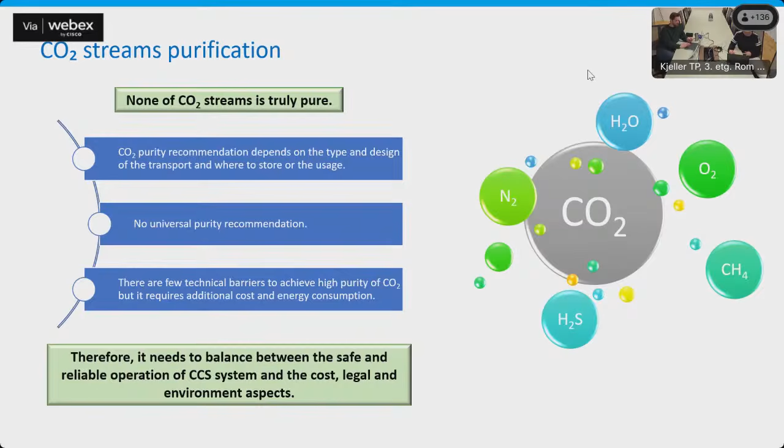So the type and concentration of impurity depends on the capture sources and the capture technology. The impurities can be divided into different groups, like non-condensable gases, for example, nitrogen, argon, hydrogen. Some impurities are reactive, for example, water, NOx, SOx, H2S, and CCS CO2 streams can also contain hydrocarbons, metals, and particles.

So the most important impact of impurity is that impurity changes the phase behavior and the thermophysical properties like density, viscosity, compressibility, and speed of sound, for example. So impurities shift the phase boundary, widen the phase envelope, for most impurities to higher pressure. This leads to narrower operation windows.

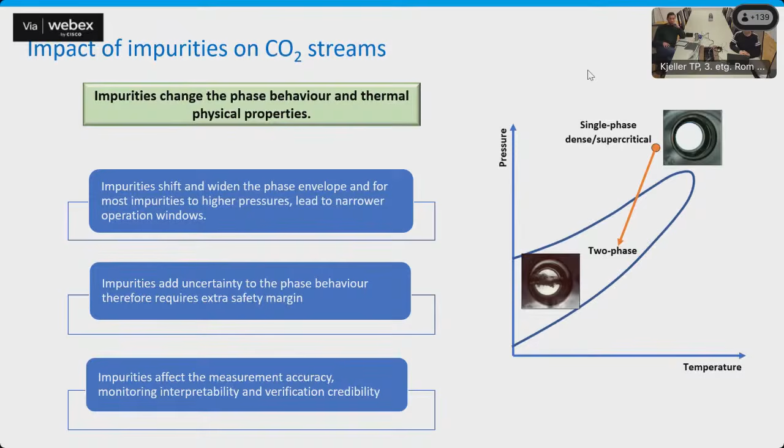Another aspect is unsafe operation of CCS infrastructures. Impurity can affect the integrity of infrastructure, both transport and storage. For example, material degradation: the impurity can drop out because the solubility varies with temperature and pressure, and one impurity can affect another impurity's solubility, so it makes the situation complex.

For example, if water drops out to form free water and reacts with some reactive impurities to form acid, then people can risk having corrosion of the pipes and the vessel walls, and can also risk having mineral dissolution in the well and reservoir.

Another hazard is solid blockage. The solid particles can come from chemical reaction, precipitation of salts and scale. When the temperature and pressure are in the hydrate formation zone, hydrate particles may also form. Some solid particles just come from the capture site. So those solids can clog to reduce the injectivity of the well and near-well region, and then reduce the capacity of the reservoir.

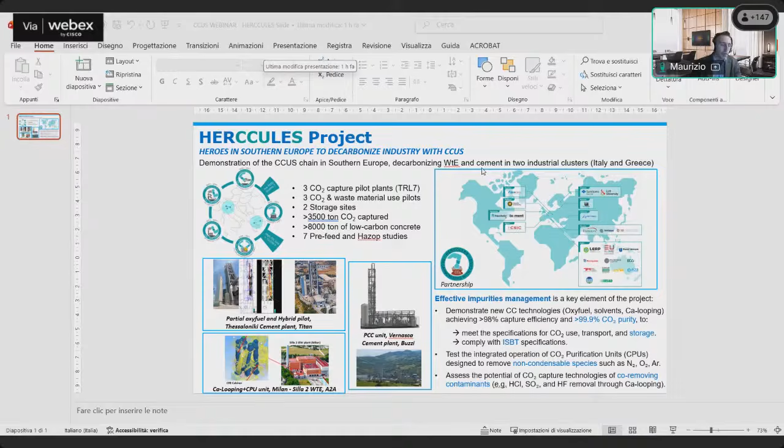I'm Maurizio Spinelli from LEAP. I'm the coordinator of the HERCCULES project. So HERCCULES, in 1 minute: HERCCULES is a very large innovation action focused on the demonstration of the entire CCUS value chain in Southern Europe. The project in particular aims to test several carbon capture and CO2 utilization technologies for the decarbonization of cement and waste-to-energy sectors within 2 industrial clusters located in Italy and in Greece.

So within the project, we are building and demonstrating 3 different CO2 capture systems, as well as 3 CO2 utilization and waste material recovery processes for the production of low carbon concrete. At the same time, we are exploiting 2 storage sites located in Southern Europe, in particular Ravenna in Italy and Prinos in Greece, in order to characterize and close the full demonstration of the CCUS value chain. Then, building on all the experimental results, we will also provide several full-scale case studies.

And HERCCULES is much more than this. We have a lot of activities in several areas. I have no time to talk about all these activities now, but I'm pleased to show the map on the right of our consortium, which has grown since the project started. I know that many partners of ours are joining this webinar today, and some of them will also contribute with some presentations.

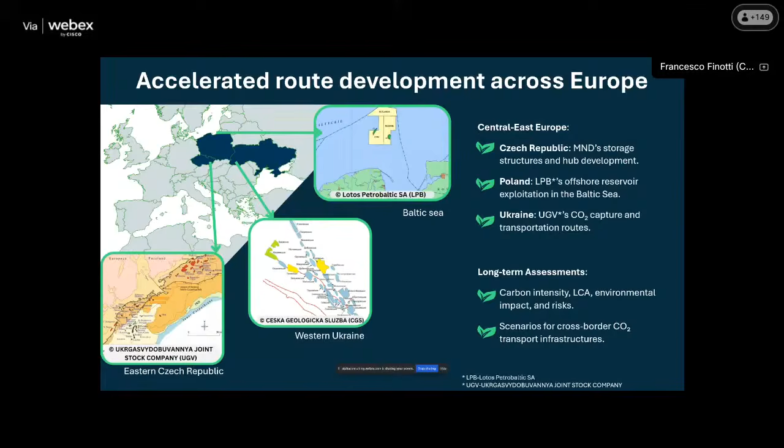So, in short, you will hear more from our technical people on the purity criteria. I think we'll have a lot of discussion on that. Thank you everybody, and apologies for the internet issues, now solved. That was it from my side.

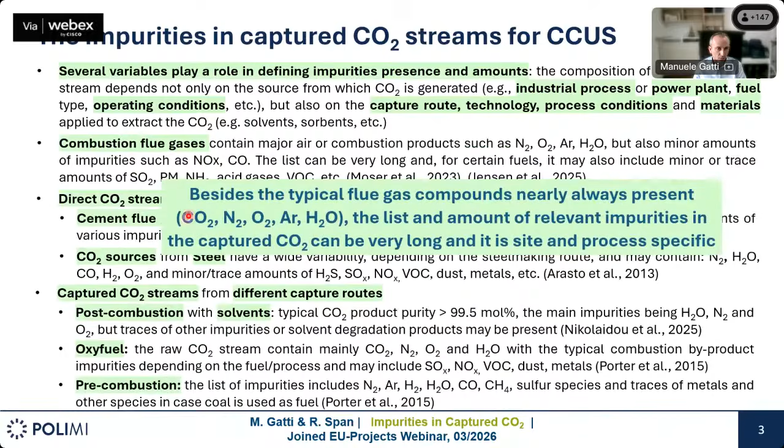Then looking at the CO2 quality specs, because it's the typical question if the CO2 quality specs can be harmonized, or if there are any guidelines. For sure, one starting point is the conditions and the mode at which CO2 is transported, because we have now multimodal transport routes, and we also have different possible ranges of pressure. We can have gas pipeline, dense phase pipeline, or ships. And for each of them, there are different constraints to look for.

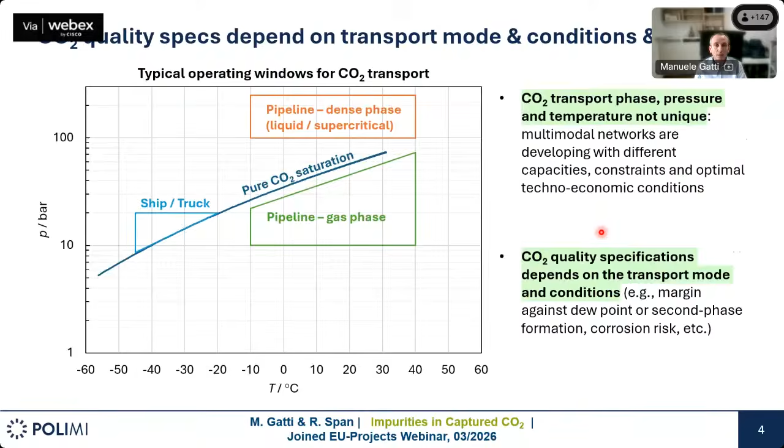So here the key points are that the focus should not be on the CO2 purity, because the CO2 purity is the balance. The real challenge is to meet the ppm level, often specification, on the most critical impurities. Impurities that then must be limited for several reasons, not only technical, but also health and safety, and also there should be the economic part that plays an important role for the deployment of the CCUS chain.

We know that impurities affect the thermophysical properties. We are going to see later a few examples, especially for non-condensables, and these in turn will affect the technical and economic part.

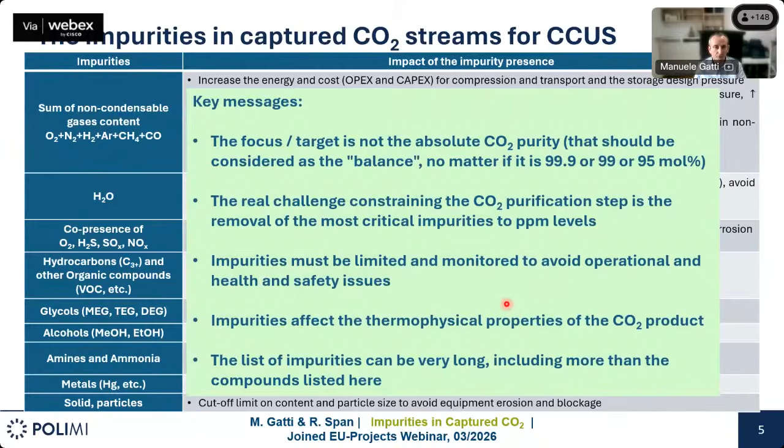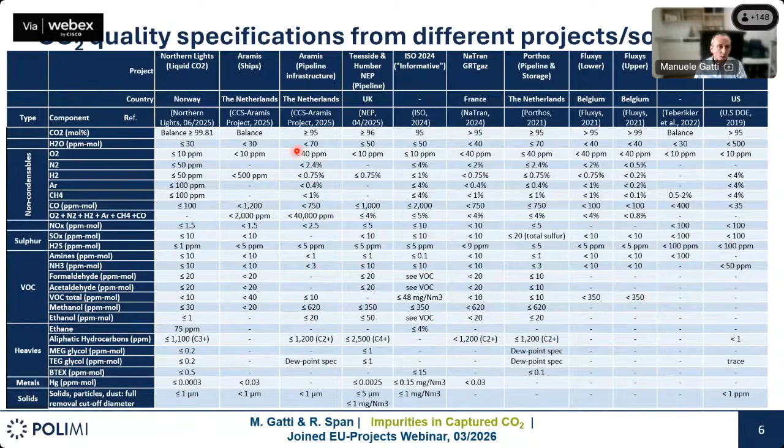Then, talking about the CO2 specification, again, I will not go through this very large table that comes from the publicly available CO2 specs from mostly commercial projects, but the idea is to give a few messages. You see that, again, for some of them, CO2 is already reported as the balance, because the real limiting factors are this list that is here kept shorter. Typically, if you look at the real CO2 specification, the list is even much longer, because there are several other species that here I couldn't include due to the lack of space. But for some species, the message is that specifications are aligned.

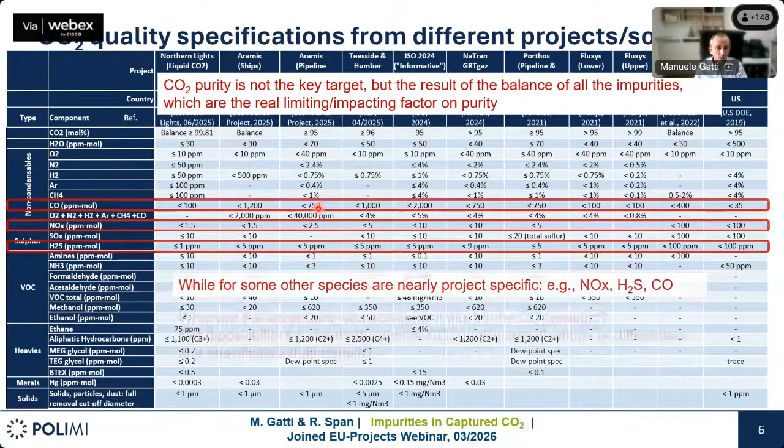For instance, for oxygen and for ammonia, they are quite harmonized among the different projects. But for some others, there are still variations that can be even of one order of magnitude between different projects. So the question is not only what are the acceptable compositional limits for a specific project, but if there is a possibility to standardize or to provide guidelines for the impurity limits.

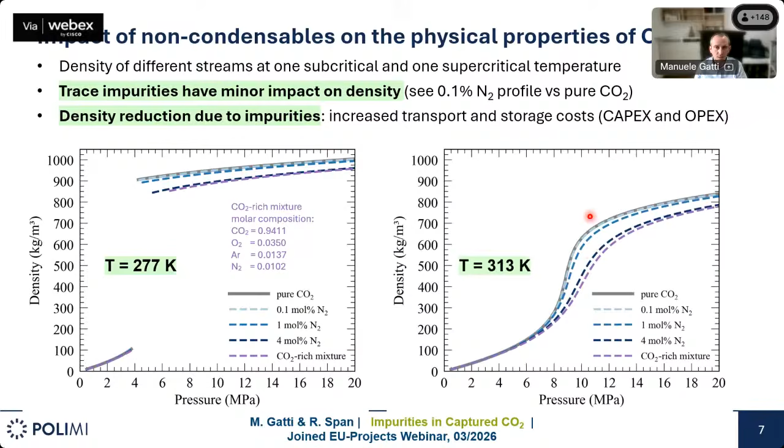Here is another isotherm at supercritical condition, where above the critical pressure of CO2, the deviation, the differences in density, is even larger. Then about phase behavior, as already anticipated by a few presenters earlier, we know that we want to avoid multi-phase flow. Either we are in the liquid or in the gas transport phase. We know that impurities affect the phase envelope.

For instance, here is the effect of different volatile impurities, so non-condensables. It's clear that, starting from pure CO2, they increase, and they may increase even considerably depending on the species, the saturated liquid line - that is, the pressure at which we need to work to stay above the saturation for a given temperature.

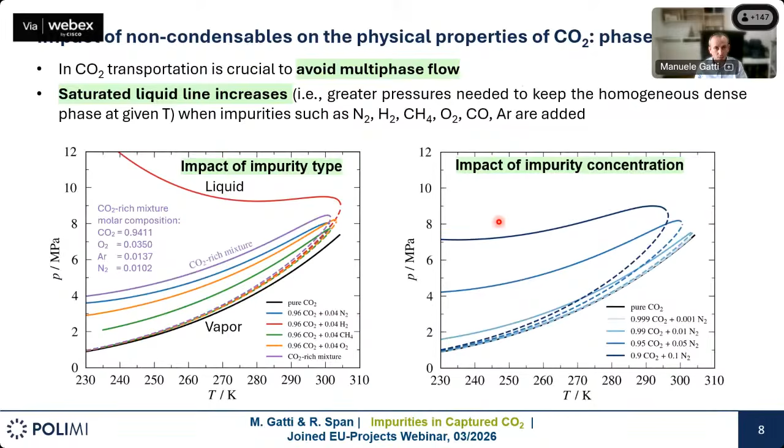On the right, you see the impact for a given impurity, for instance nitrogen, in terms of different concentrations. So from 1000 ppm up to 10%, you see a clear shift of the critical point, but also an increase of the saturated liquid line.

Then here a couple of examples we report are just to show that the topic is much broader than just defining a compositional list, because when designing the processes, or when analyzing them from the point of view of process modeling and simulation, even the selection of the thermodynamic model is important.

If for pure CO2 it is well known that the Span-Wagner model is the most accurate reference one, for mixtures, the choice depends even on the simulation environment, on what is available. For instance, here for the pure CO2, we see that we use Peng-Robinson in the vapor phase - it's reasonably accurate, but issues start occurring when we go into the liquid region. That is the typical issue of cubic models.

When instead looking at mixtures, here is an example of an oxy-fuel type mixture. We see that if available, the GERG should be the favored model, but here is a comparison of three different models like the GERG and Peng-Robinson with calibrated KIJ. Again, they are quite aligned in the CO2 compression power profile, so in the consumption for CO2 compression, but then differences arise in the liquid region.

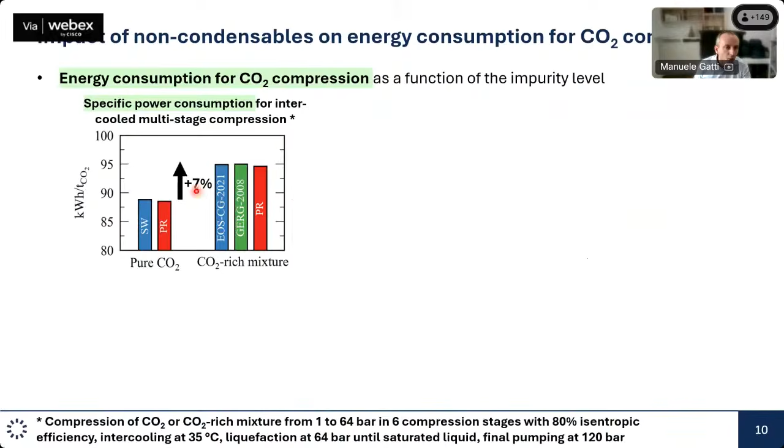Here are some numbers from the previous example on how much the CO2 compression power increases under the same conditions. So compression from 1 to 64 bar in the vapor phase, then liquefaction, and then pressurization in a pump - of course, for the mixture, purification should occur in between. You see here the clear increase in specific compression power, and of course this reflects into greater OPEX and greater CAPEX for processing, transporting, and storing the CO2.

Finally, here is an example of a CO2 purification unit that we have been designing and modeling with the previous tool. We start from a composition in this example that is typical from an oxy-fuel process from cement, for instance - this was from the CLEANKER project.

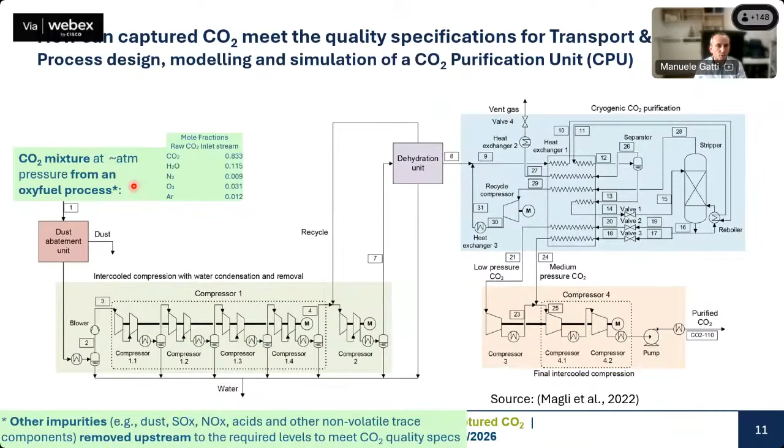We assume that upstream of it, the impurities that would end up with the liquid CO2 should be removed - so dust, SOx, NOx, acid, all non-volatile species that can affect the CO2 purification unit shall be removed in advance. And then we follow a typical process of the CO2 purification unit with an intercooled compressor that also has a knockout drum to remove water, which initially was 11.5% and is then lowered down to 2700 ppm. Then to reach CO2 specification in terms of water, the dehydration unit and adsorption dryer is needed. In this example, we reach this specification.

And then we enter the low temperature part where we have the cold box, where the CO2 rich stream is cooled down, in this example, to -50, because the temperature and pressure at which you do this, and also the configuration of the cold box, shall be optimized depending on different objectives.

In this example, you see how for a different content of CO2, the CO2 recovery changes as a function of the separation temperature. That is the key variable here. In this example, with refrigeration close to -50 degrees Celsius, we reached 10 ppm of non-condensable level in the CO2 product.

CO2 in this example is then pressurized in the vapor phase, but in other examples can be delivered as a liquid. Finally, in the off gas, part of the CO2 that was not purified is still remaining. In this example the CO2 recovery was 96%. Again, depending on the target, that CO2 can be further processed or recycled back in order to increase the CO2 recovery rate. The consumption here was 126 kilowatt-hour per ton of CO2.

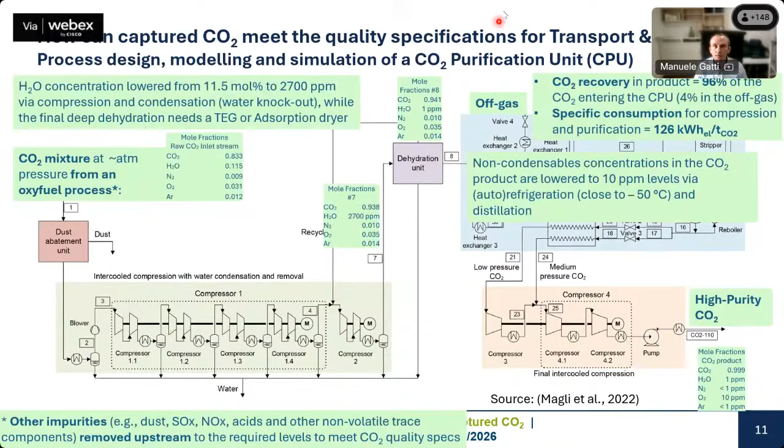Now I leave the floor to Professor Roland Span. Are you there, Roland? Yes, I am. Okay. Are you going to share your screen, right? Yes, I am. Good. You should see my screen now. Yes. Okay. So, thank you, Manuele, again.

Now, what Manuele already pointed out is that we have to look at different concentration levels for the different impurities. Depending on the kind of gas we are treating, depending on the capture unit, we typically see impurities in the percentage range, like nitrogen, oxygen, argon, or typical non-condensable gases. In the per mil range, we typically see water. And then we have impurities in the ppm range, typically components like SOx, NOx, H2S, whatever.

Now, the important message to all of you is people are usually discussing CO2 purities, but that's far too simple, because whether CO2 has a purity of 95, 98, or even 99.8% tells nothing about the really critical impurities at per mil or even ppm level. So even in 99.8% pure CO2, you can have unacceptably high concentrations of water, SOx, NOx.

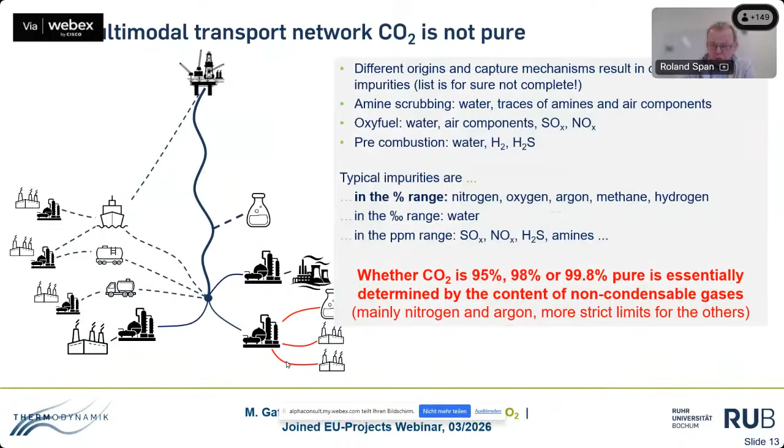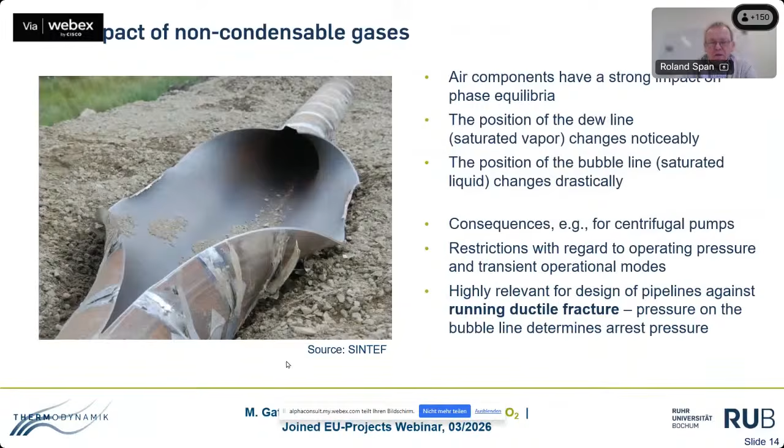Now, if we talk about non-condensable gases, many of you will be aware that for pipeline transport, they are critical for operational reasons, but mainly also for the issue of running ductile fracture. That's something Svend Tollak will go into in the next talk, so I won't mention that here any further. What people are usually less aware of is that for tank transport, non-condensable gases have a strong impact on the allowable storage time at medium pressure transport. But these are things that are pretty well understood. We do have good models describing mixtures of CO2 with non-condensable gases.

The next issue is water, as I said, up to per mil range in the raw CO2. The phase equilibrium of water and CO2 is very complex. We have vapor-liquid equilibria. At higher pressure, we have liquid-liquid equilibria. At low temperature, we are facing ice formation, hydrate formation. But still, all these phase equilibria are relatively well understood. And under pipelining conditions, we should expect that about 2000 ppm of water in CO2 are acceptable without forming a separate water-rich phase.

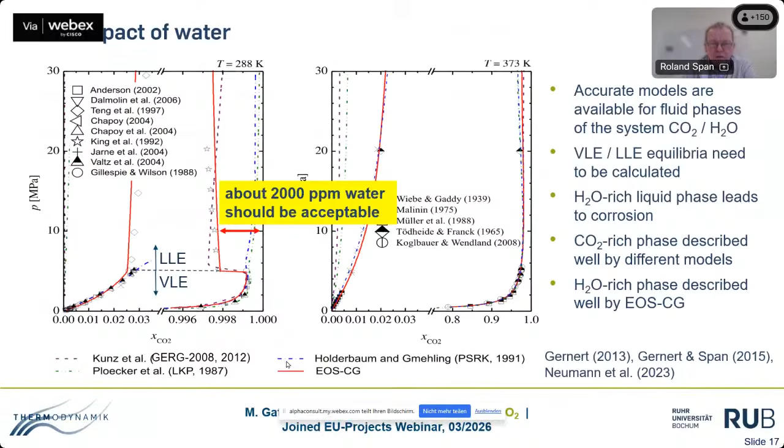Now, at low temperature in the pipeline, hydrate formation may become an issue, which may lead to blockage of systems. But this is understood pretty well too. So I didn't want to show the complex 3 and 4 phase lines of hydrates at this point. What industry is mostly interested in are the limits below which solid phases can occur, and that's something we can calculate.

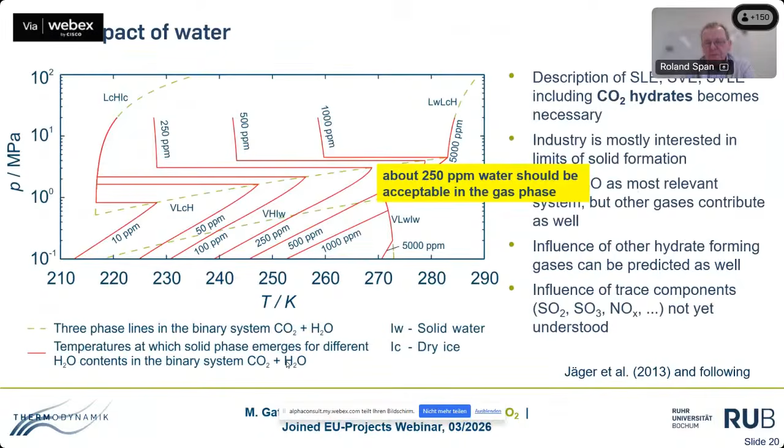So for gas phase transport, about 250 ppm of water should be acceptable without risking solid formation at typical pipeline conditions. In the dense phase, it's even higher, more than 500 ppm water would be acceptable. For medium pressure tank transport at low temperature, ice and hydrate formation becomes a larger issue. So in that range, we could accept only something like 30 ppm of water without the risk of solid formation.

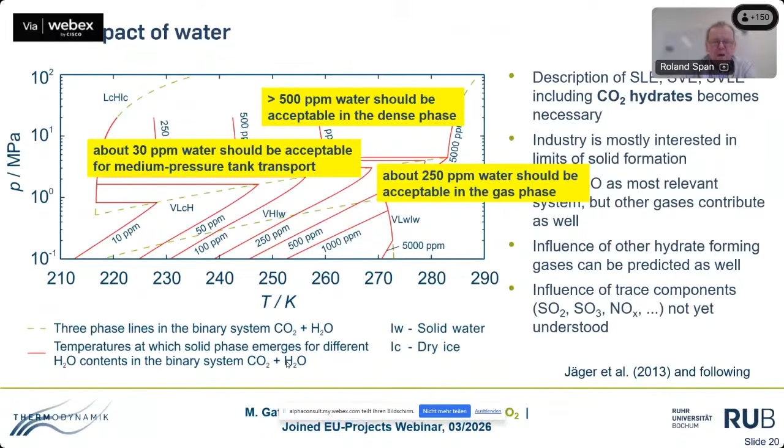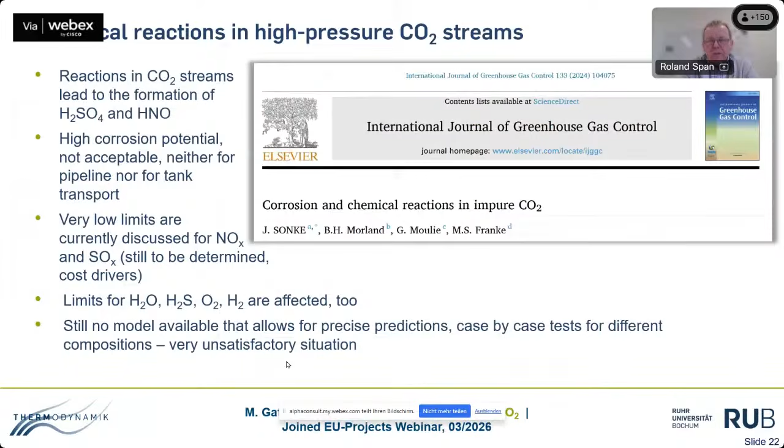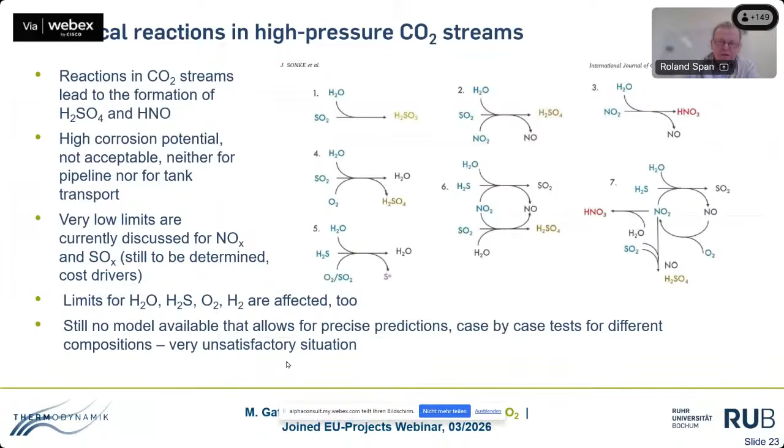And these reactions, in the end, all lead to the formation either of sulfuric acid or of nitric acid. And sulfuric acid in particular forms, together with water, a second highly corrosive phase at concentrations which are much lower than the concentrations we see for the condensation of pure water. Now,

IFE in Norway has run extensive tests, very complicated tests, to see where we find dropout of a second phase and where corrosion becomes visible. And the only software tool I'm aware of which is used to predict this is OLI MSE, which is kind of a black box software. In principle, we know what kind of models are used, but the parameters are proprietary. So it's hard for us as scientists to really evaluate this.

But Sonke et al. compared the results of OLI MSE with their experiments, and only in 19 out of 34 mixtures they got a qualitatively correct result. We don't have information on the actual composition of the acidic phase. But what is obvious is that we do not have models yet which describe the formation of acidic phases in supercritical CO2 at pipeline or at tank conditions with sufficiently high accuracy. And that's what most of the impurity discussions now are about.

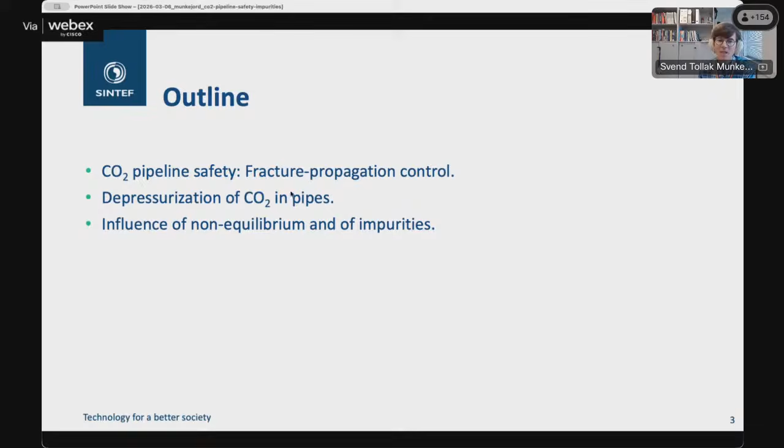All right, so I'd like to mention the concept of fracture propagation control. I talk about depressurization of CO2 in pipes, and mention influence of non-equilibrium and of impurities.

So I guess this is known to most of the audience, but just to reiterate, by mid-century, several countries, including the EU, have pledged to be climate neutral. We need to use all the tools in the toolbox, including CCS, and globally this would entail the capture, transport and storage of several gigatons of CO2 per year, which, as far as I know, is roughly in the same order of magnitude as natural gas today. So evidently we need a very large system, and it should be optimized and safe.

And of course, we have experience with oil and natural gas, but CO2 is different in several ways, and in particular because of the tight coupling between fluid dynamics and thermodynamics. In operation, we will be close to some of the thermodynamically interesting points, like the critical point and the triple point, which I'll touch on, and this gives phenomena like boiling due to depressurization or dry ice formation, etc. And engineers, when making safe and optimal systems, need models that are experimentally validated in order for them to be able to assign numbers to different effects.

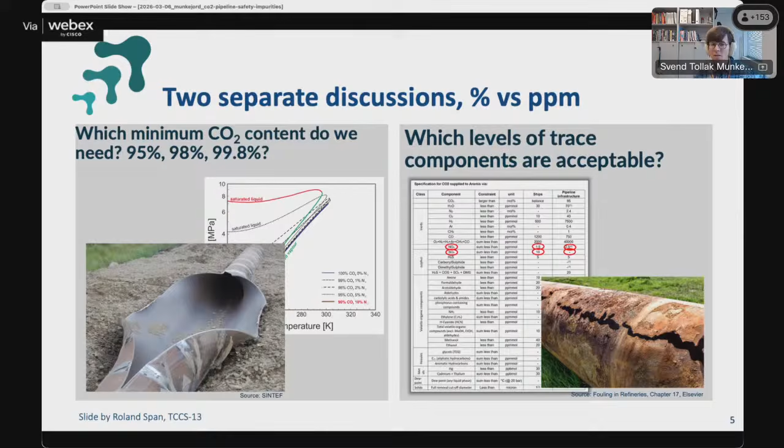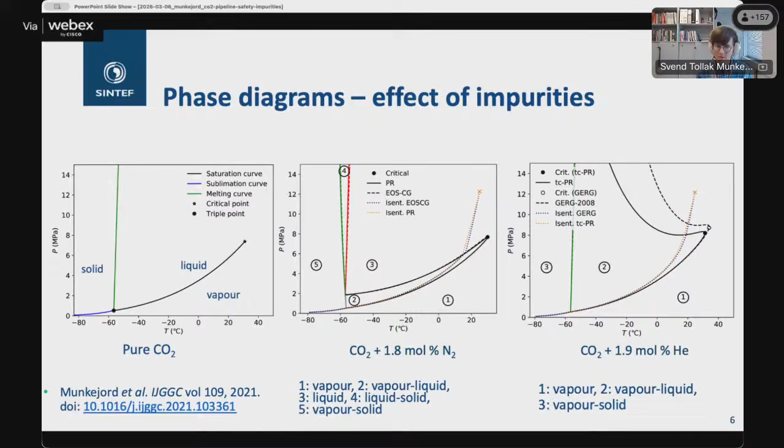Okay, now for running ductile fracture, what is it? Well, imagine you have a pipeline containing a pressurized and compressible fluid, and for some reason, be it corrosion or third-party impact, a hole is generated in the pipeline. Now you want to know whether the hole stays a hole or whether it will develop into a crack propagating along the pipeline. And in order to understand that, you need to understand the forces from the fluid inside the pipe on the opening pipe flaps, as well as the competition, as it were, between the crack velocity and the decompression velocity of the fluid inside the pipe.

Now, if the crack is faster than the fluid decompression, this means the crack will always stay at a high pressure, so it can continue over a long distance. And this is something you want to avoid by using the right steel quality and pipe thickness. Not too much, because then your large system becomes too expensive, and not too little, of course, which would be very detrimental.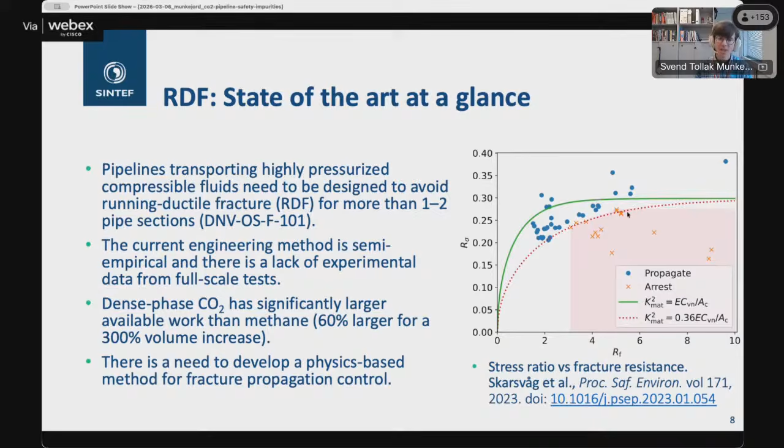And in particular, when making this plot, you put in the measured pressure, but when engineers want to evaluate a new design, they typically put in the equilibrium pressure, the boiling pressure, and they are not the same. And in addition, this method assumes that it is only the pressure at the crack tip that decides, and that's also a strong simplification. So there is a need to develop a physics-based method for fracture propagation control.

At SINTEF, we've worked over some years on a coupled finite element computational fluid dynamics model describing running ductile fracture. And it consists of a 1D CFD model that describes decompression and flow inside the pipe and out of the pipe, and a finite element method describing the pipe and the crack propagating.

But first, some validation we did some years ago for CO2. So I'd like to briefly explain this. The plot at the left shows crack speed plotted as a function of crack position. The red dashed line is the experiment, and the black curve is the simulation. And you can see that the experiment has a slightly coarse resolution. This is because of the way that it's done. You attach strings around the circumference of the pipe, and when they break, you know where the crack is. But at least there is a ballpark agreement here.

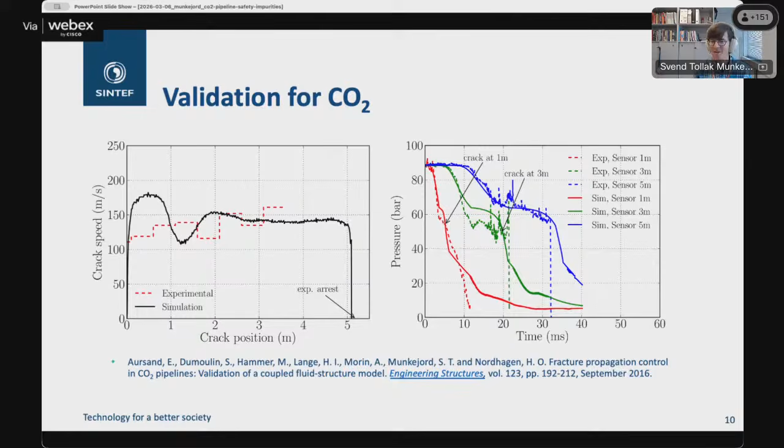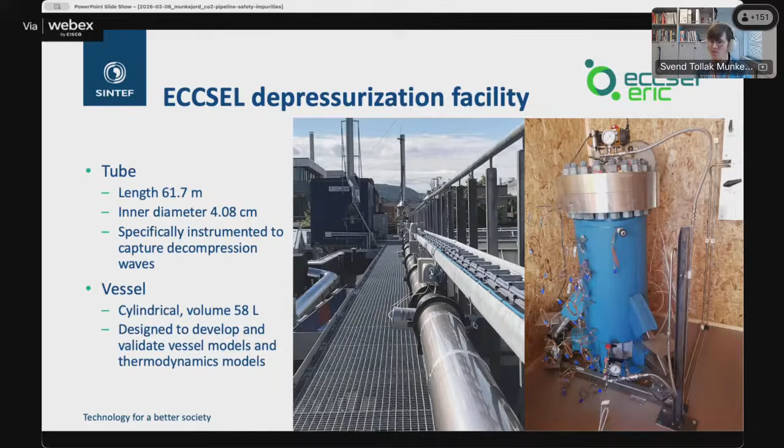Okay, so now for some further development and validation of flow models. For this, we use data from the ECCSEL depressurization facility, which is located at the Thermal Engineering Lab in Trondheim. ECCSEL, by the way, means the European CCS laboratory infrastructure, and it consists of several labs in many countries. This is a 60-meter long tube. It's densely instrumented with temperature and pressure sensors so that we can capture what happens when there is a full bore rupture. There is also a vessel, but I won't talk about it here.

Now, at one end of the tube, there is a flange like this, and we attach a rupture disc, which is fabricated and calibrated to rupture at a given pressure. So for the experiment, we slowly and carefully raise the pressure inside the pipe. At a given pressure, the rupture disc ruptures, and then we take the data of what happens when the pressure wave travels upstream. Doing that, we can make plots like this, and I'll try to explain.

So if you look at the left-hand plot, there are 3 positions at which we measure the pressure. The blue is close to the outlet, and the 2 others a bit further upstream. There are 3 different fluids here. The full line is pure CO2, the dashed line is CO2 with nitrogen, and the dotted one is CO2 with helium. And you can see, looking at the green one here, for instance, the pressure drops later with CO2 helium. This means that the pressure propagation speed, or speed of sound, if you will, is slower in the mixture. It also levels off at a higher level, which means that this mixture boils at a higher pressure, as you also saw in the phase diagrams.

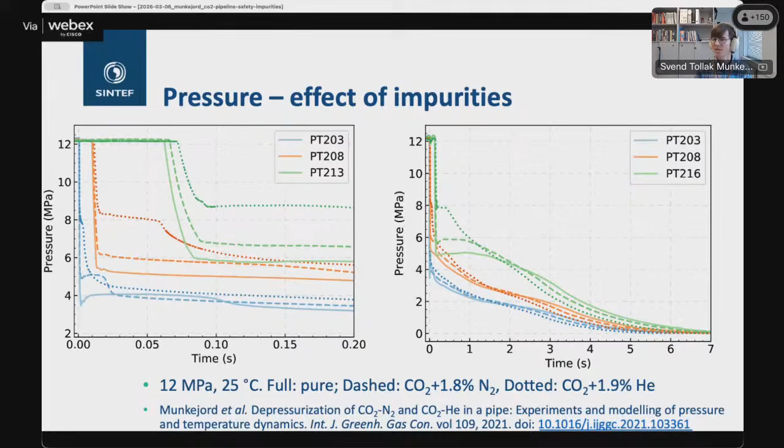Then there is an interesting point that I'd like to talk about briefly here on the plot where I show a longer time series. Initially, the full line here for the green one is at a lower pressure, as you can see also to the left, but after 2.5 seconds, more or less, the curve showing the pure CO2 has the highest pressure. So there is an inversion. And the reason for this, in our understanding, is because pure CO2 has a lower pressure propagation speed for a fully dispersed gas-liquid mixture, which you have at the outlet. So this means that the pipe with pure CO2 is emptied slower than the ones with mixture.

Now, using these data, you can make a plot like this, which is used by engineers for assessing running ductile fracture. It's a bit quirky, but this is how it's done. So they plot pressure as a function of wave speed. This is the speed by which pressure advances with respect to the fixed pipe. So if we concentrate first on the right-hand side, the decompression starts here at 12 megapascal, then it goes downwards like this. You can see here there is good agreement between experiment and calculation. We used, by the way, for pure CO2, the Span-Wagner equation of state here.

At this point, interesting stuff is happening. So if we assume full thermodynamic equilibrium, then our model tells us that as soon as we have any vapor present, the wave speed jumps down to the value here. Now, instead, if we assume that the liquid would stay liquid, metastable, then we get the green curve, and our data shows something in the middle. So this does not mean that the Span-Wagner equation of state doesn't work. It only shows that in this case, the process is so fast that there is no equilibrium.

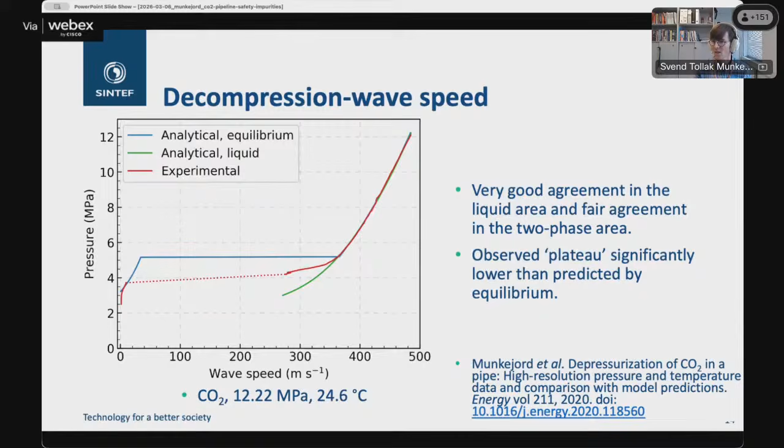Okay, now if you have a pipeline and you want to consider different operating windows and how this will influence running fracture, it's useful to make a plot like this. So fast decompression will be isentropic, so that's why we illustrate various isentropes here. And you can see on a summer day, for instance, with more than 20 degrees and a pipeline with a low pressure, you can hit the 2-phase region at a higher pressure than for a cooler day and a higher pressure. So in effect, for running fracture, a lower pressure in the pipe can be more severe than a high one, which is counterintuitive until you've seen this plot.

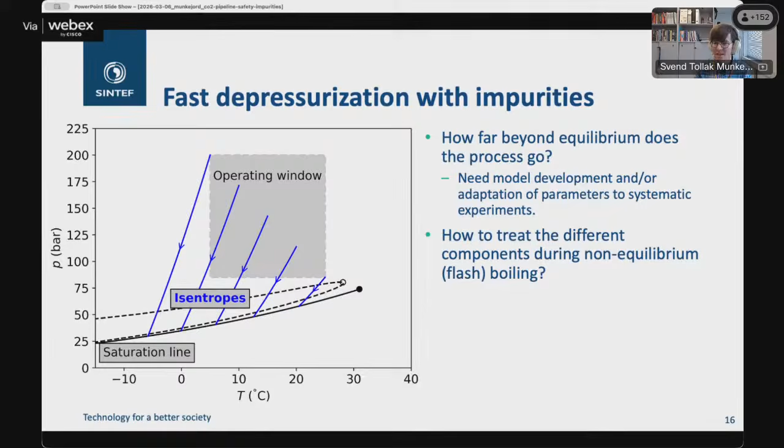And with this, I'd like to conclude that pipelines transporting pressurized compressible fluids must be assessed for running ductile fracture. Current engineering methods are mainly empirical, and more accurate design requires the development of models containing physics, including the influence of non-equilibrium on the boiling pressure and pressure wave speed, and also the behavior of impurities in that process. And we need systematic depressurization experiments for model development and validation. And also, these insights will be directly relevant to understand other but similar processes like the flow through nozzles or valves or leaks and the dispersion of CO2 in the surroundings following a leakage.

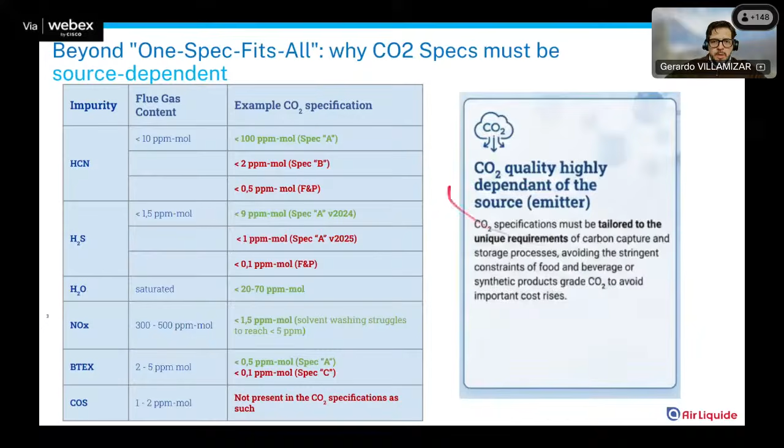I put other examples which are not related only with corrosion, but with safety, like aromatics. There are several specifications out there. Depending on the flue gas content, the specification may or may not be an issue. Of course it also depends on the capture technology, but this example is with a given capture technology. This is why the message is: the quality is highly dependent on the source. We cannot conclude only by looking at the product, we need to see also the feedstock, which brings me to the next slide.

This is a critical component, the liquefaction terminal. Why? Because in this case you may end up having two different specifications: the ones for the pipeline before the terminal and the ones for the liquid CO2. So the key message here is, we saw the CO2 specification's criticality depends on the source, but also on the industrial setup, which means a well-defined CO2 specification must include not only the values of impurities, but also the conditions where this specification has been defined: operating conditions, temperature, pressure, liquid, dense, gas phase, or other.

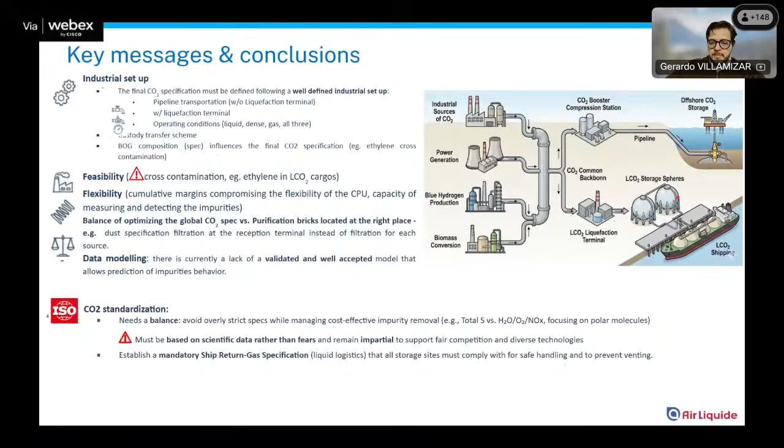Key message and conclusions also here. So again, this is always a balance, and when it comes to balance, we need to talk to measurement. And measurement is really critical, because it not only impacts capex, but also impacts the contractual framework. Having specifications in the table as 'not allowed,' 'balance,' 'zero,' or just families is simply not acceptable. You cannot measure balance.

You need to measure 99.99, 99.5% mole of CO2. You cannot measure balance. So it may work for a scientific work, but for industrial projects, it doesn't work. It's as simple as that. We need to have values of the impurities and the CO2 in order to contractualize an industrial project. So this kind of wording is simply not acceptable, not workable, not real.

Families - what is the issue with the families? It's because we cannot measure aromatics. We need to measure something that represents the family. So we need the breakdown. When it comes to total sulfur, we need the sulfur speciation. We cannot just measure the family. This is critical.

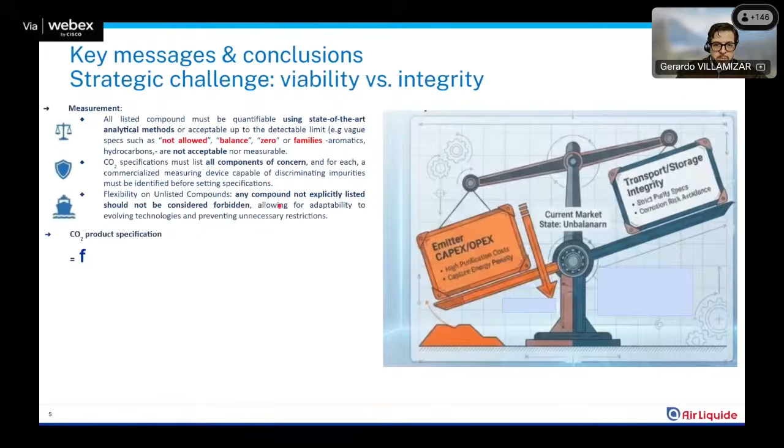And well, as a final conclusion, I wanted to give you the takeaway. The CO2 product specification is a function of a well-defined flue gas composition, so the feedstock to the capture unit, the industrial setup, defining applicable operating conditions. So I want to see those conditions in the table. Realistic analytical solutions consistent with the proposed CO2 spec.

Okay, we cannot just say 0.1 ppm NOx - maybe there is no technology available to analyze that. The scientific sources, so linked with what I mentioned before, CO2 spec defined based on facts, not on fears. And specifically for liquid CO2 projects, a well-defined boil-off gas specification. Thank you.

If you're already here, please, the floor is yours. I'm sure you can hear me. Yes, and my presentation, it is good. Yes, but it's not in viewer mode, it's in presentation mode but not in the proper way. I will fix it. Is it good now? No, still not, I will switch it. Yes, I will present it, but it's a little bit complicated. Let me show it, just test it before. Maybe it can work now. Yeah, it is good. Are you sure? Yes, confirm, that's perfect. Okay, perfect.

Thank you for the introduction. My name is Yanshu Wang. I work for Natran Research and Innovation in France, and we will share this session with my colleague from Sintef, Chao. The basic idea is that I will give a brief introduction for this section, and then my colleague Chao will give a concrete example. So, just for a general introduction to the CO2 value chain.

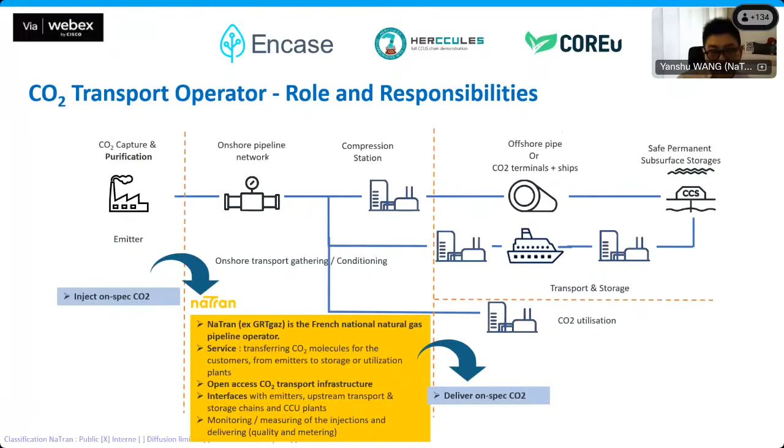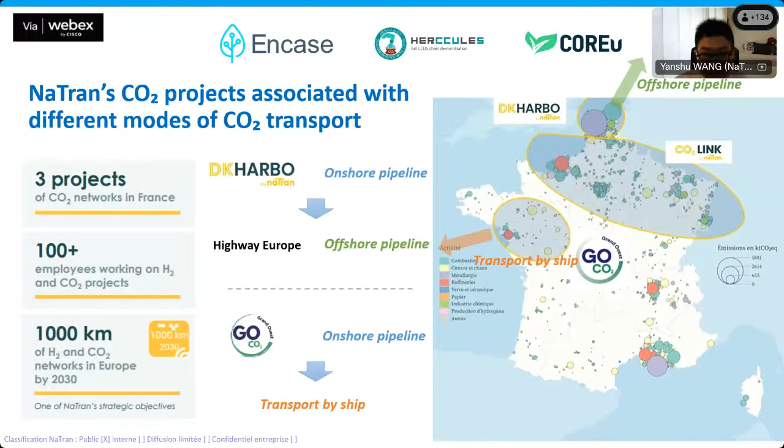To give you some idea about different modes of CO2 transport, I will use our company's projects as examples. We are working on 3 projects of CO2 network in France. The first, DKHarbo, CO2 Link, is related to the northern part of France: we will collect CO2 and transport it via onshore pipeline, then transport it by offshore pipeline with the Highway Europe project. Another project concentrates on the western part of France, where CO2 will be collected and transported by onshore pipeline and then by ship. So here we have some idea about different modes of CO2 transport.

Now we talk about purity. The first idea is that purity is not a checkbox, it's a system-wide cost and risk level. We have seen that the CO2 influx in the pipeline, in the CO2 value chain, is never pure. There are always impurities, and they give different impacts. In this section we will concentrate on the economic effect.

That is to say, how do we make the best choice, the trade-off between different specifications. The first idea is that the trade-off is not as simple as choosing between one stricter spec or one looser spec as shown here. It's a very complex decision. We should consider, of course, technical aspects, but also economic aspects.

It depends on the economic model, on organizational issues, and somehow political issues, etc. It is a very complex decision. But generally speaking, if we focus on stricter spec, we will reduce the risk but raise the cost, potentially especially for the purification step. If we choose the looser spec, we may have higher tolerance at the capture plant for purification, but for pipeline transport or other modes of transportation, we may have corrosion issues, tighter operating envelopes, or possible flow assurance issues. The main idea for this section is that optimization is project specific.

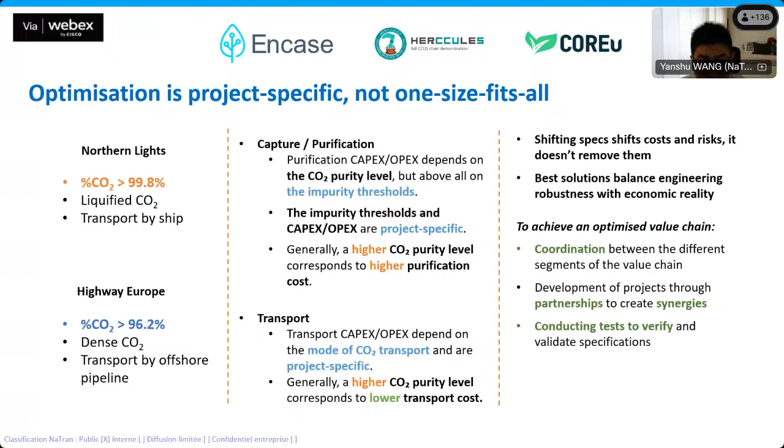So I will now let my colleague Chao continue the presentation to give you a concrete example. Thank you. Oh, thanks, Yanshu.

Do you want me to share? Can you share? Okay. Yes, please. Yeah, I will share. No problem. Thanks. Yes, next, please. But it's still in the speaker mode, so could you maybe enlarge it a bit? There will be a little issue. Is it good for you? No, it's still the same. Now it's better? Yeah. It's still not full mode, but at least it's bigger. I think it's okay now. Can you move to the previous slide, one slide before? Yeah.

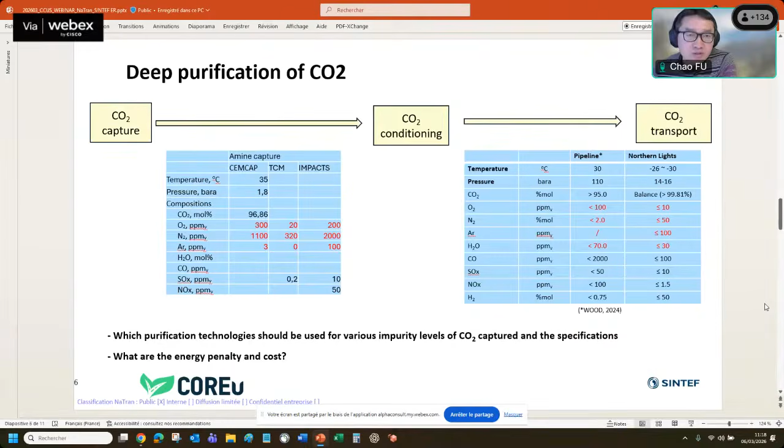Okay, thanks. So I'm going to introduce our work on CO2 conditioning in the COREu project. We have already talked a lot about CO2 impurity sources and the specifications this morning. So the question is how to get from these CO2 sources with different impurity levels to these many different specifications. Which purification technologies should be used for a given CO2 impurity and a given CO2 specification, and what are the energy penalty and cost? That's something we want to understand. I'm not going into these details because we have already heard a lot this morning. Move to next, please.

Okay. This slide is a bit busy. It shows the available technologies for deep purification of those impurities. For this project, we are not expected to cover all the impurities, so we have identified what we call critical impurities to be studied. For example, NOx, SOx, these acid gases, and also the atmospheric gases. For nitrogen and argon removal, as far as we know, low temperature phase separation is the only available technology. And if you want to get to this sub-ambient low temperature process, you need to remove the water down to 10 ppm. So you need this refrigeration process also. What I'm trying to say is that the technology selections may be interconnected.

And for oxygen removal, you can do low temperature flash distillation. Again, you need to control the water down to 10 ppm. And in order to control the water to 10 ppm, you need to use molecular sieve dehydration technology. You can also use catalytic oxidation.

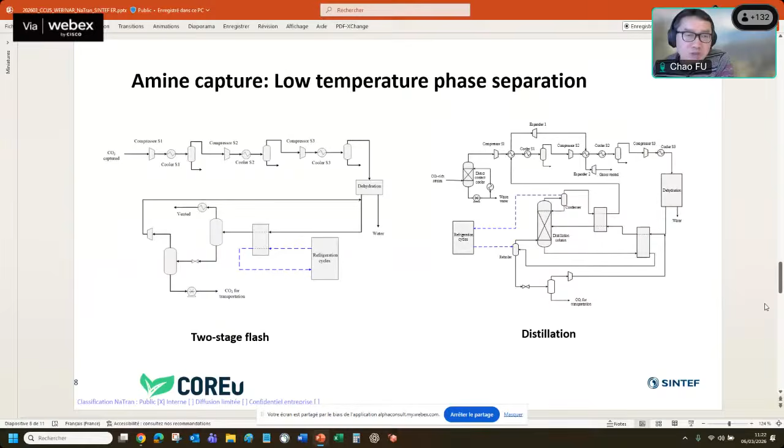Next, please. I just use this two-stage flash as an example, and this is a bit small here. These two figures show oxygen removal using the two-stage flash. The question we are going to answer is, for different oxygen levels in the feed stream, for example 500 ppm, 300, down to 20 ppm, if we want to reach these different specifications, what is the energy consumption and how does the CO2 recovery

change. For example, on the left figure, for the blue curve, if you have 500 ppm in the feed stream and want to control it down to 50 ppm, you have a CO2 recovery rate around 87%, which means you lose 13% CO2 here. For amine capture, normally we use a 90% CO2 capture rate. You already lost 10% CO2 there, and I don't believe we want to lose 13% here also. So normally we want to lose as little CO2 as possible in this

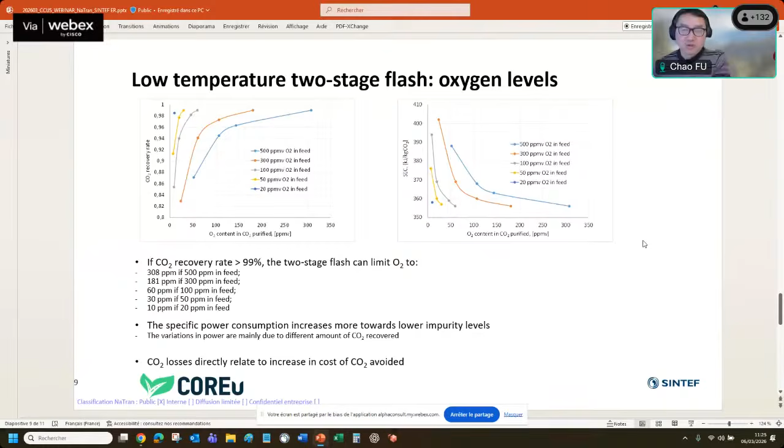And the right figure shows the specific power consumption. The change is mainly due to the different amount of CO2 recovered. And this CO2 loss is directly related to the increase of the cost of CO2. And the next is my last slide. Next, please, Yanshu. Yanshu? Yes. Oh, sorry, it's here now.

If you have a mixture of oxygen and nitrogen, then you can use these curves to get two different CO2 recovery rates. And then the actual CO2 recovery rate corresponds to the lower one. I have two examples here, but I just explain one here.

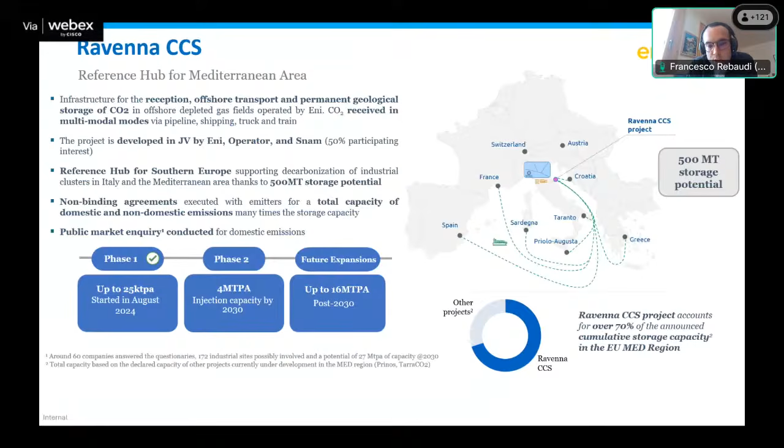To get more in detail about what is included in the project, maybe next slide. Okay, the Ravenna CCS project includes the Ravenna Hub, which is a reception unit, a regasification unit, which will receive the CO2 in liquid form, coming from ships from other European countries of the Mediterranean area, France, Spain, Croatia, Greece, and so on. So this Ravenna Hub, which is located in the Ravenna Harbor, will receive the CO2 coming from ships, trains, and trucks. Then there is the Casalborsetti compression station, which is the place where we are going to compress the CO2 towards the storage facilities.

And of course, the Ravenna CCS project includes all the offshore facilities necessary for the storage of CO2, offshore pipelines, platforms, equipment, wells, and so on. In parallel, SNAM is developing the transport infrastructure in northern Italy, a network composed of pipelines, which will be developed in phases. The first phase of this network is currently under permitting. We obtained big news last month, a positive environmental impact assessment for the first part of this network, which will be developed in phases in order to connect the industrial cluster of northern Italy and in further expansions also other European countries.

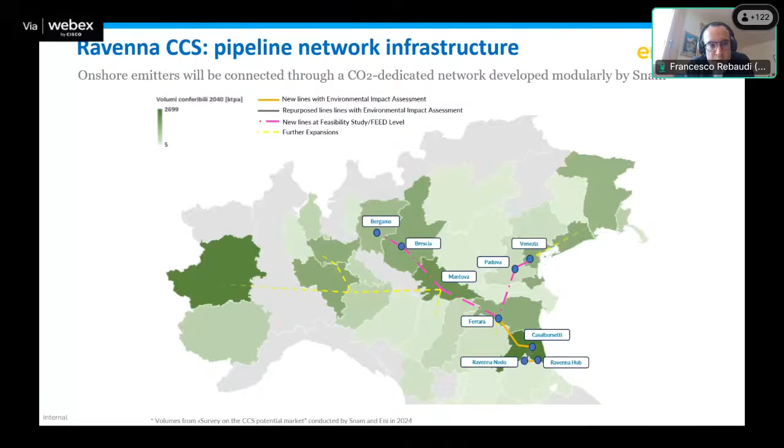In this network, we are also planning to repurpose an existing pipeline, which is currently used for the transport of natural gas. We are going to convert it for the transport of CO2. Now I can leave the word to my colleague Matias, who will provide some technical insights about the repurposing and about the management of CO2 along the transport infrastructure. Thank you.

Thank you very much, Francesco. As he mentioned, I am Matias Bronzini. I'm from the technical direction of SNAM. Now I will take the point of the repurposing.

As Francesco mentioned before, we have 15 kilometers of pipeline that we will reuse from natural gas transport to carbon dioxide transport. This is a 24-inch pipeline, 15 kilometers. And this transport will be done in gaseous phase. This is important to mention. All the onshore network between the emitters and the storage site will be in gaseous phase for the Ravenna CCS project. So we started a process of certification for the repurposing.

Basically, this process involved two phases. One is the approval in principle certification, basically the document collection to perform gap analysis regarding the composition, the flow assurance, the effect of low temperature, and the potential risk of internal corrosion. We did a gap analysis with the standards that were issued before 2025, because the date of the certification is 2024.

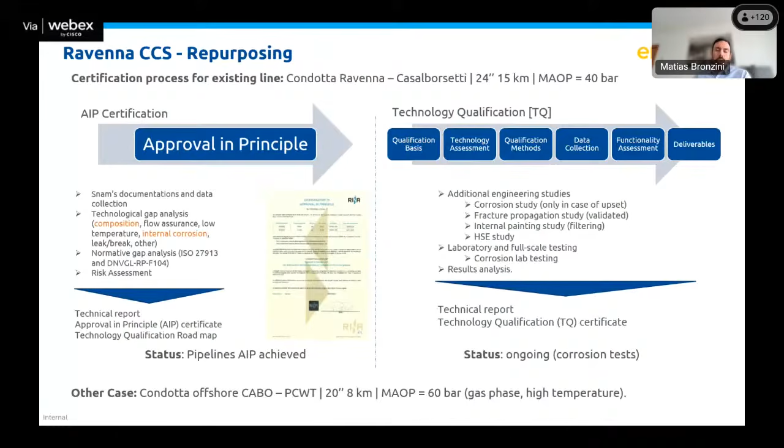For the next slide, we wanted to mention some operational points, and in this case, it's a very nice opportunity to mention the national technical rule that was issued last year in Italy. In October 2025, the government approved and issued the technical rule for the transport of carbon dioxide. And from the operational point of view, we wanted to mention the main principles.

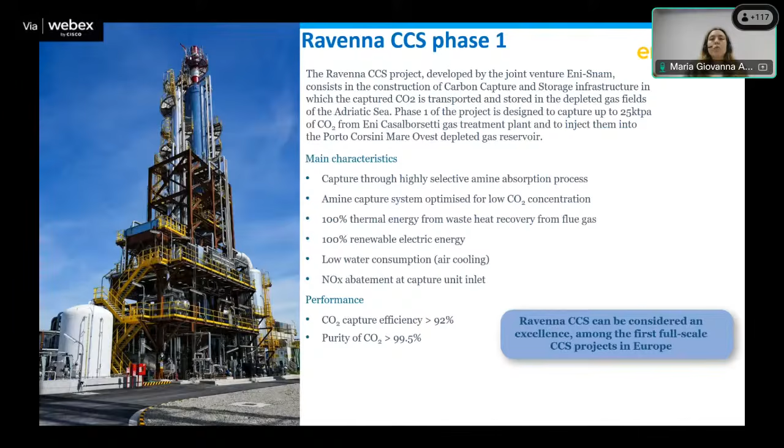Other things to mention: we are able to recover 100% of thermal energy from the hot flue gases, and also have low water consumption because we implemented air cooling. After the capture, the CO2 goes to the compression station and then a conditioning section. In this slide, I will introduce you to the purification sections we had within Ravenna CCS phase 1.

Specifically, we had first a flue gas pretreatment after the heat recovery steam generator, which allowed us to recover heat from the hot flue gases. Through this we were able to produce steam to be reused in the CO2 capture section for regeneration. So the first part for purification is this flue gas pretreatment, which includes removal of nitrogen oxide. This pretreatment was necessary both to have a low concentration of nitrogen oxide at the entrance of CO2 capture and also to respect the environmental emission limit for nitrogen oxide emissions from the flue gases.

And also this allows us to be within the CO2 specification needed for CO2 transport and storage. This was more a consequence of the flue gas pretreatment that was needed before the CO2 capture.

However, there was also a necessity to implement another step for CO2 purification and conditioning, placed after CO2 compression. This includes the removal of oxygen. In this case, we implemented a package provided by BASF, including catalytic oxidation of hydrogen for oxygen removal, followed by dehydration through solid adsorption on activated alumina. After the CO2 conditioning, the CO2 is sent to CO2 transport and storage operations.

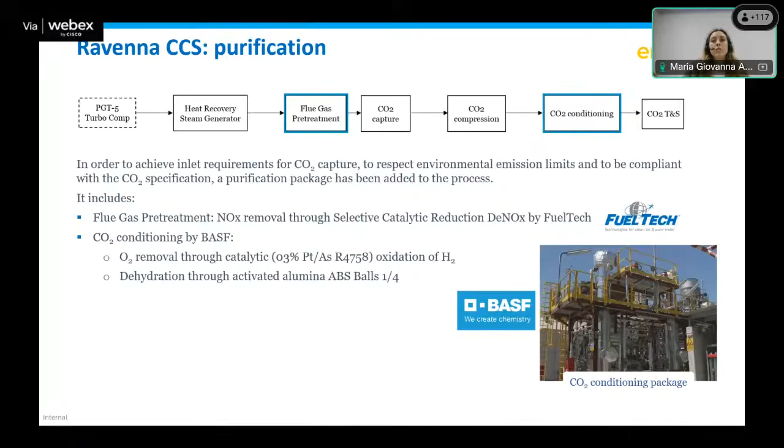An important aspect evaluated in this project was the presence of water in CO2. This is because in this case we had CO2 transport in gas phase at about 40-50 bar, and it was very important to avoid condensation and multi-phase transport, multi-phase flow.

This is why we monitored the water content continuously, but as I already mentioned, there was a dehydration treatment, and also for water we had always been below the specification limit of 50 ppm. However, we also adopted a sampling campaign to monitor all the impurities and specifically verify the CO2 phase behavior, to verify that there were no CO2 condensation or water condensation phenomena that could potentially bring water dropout and also dropout of acid species.

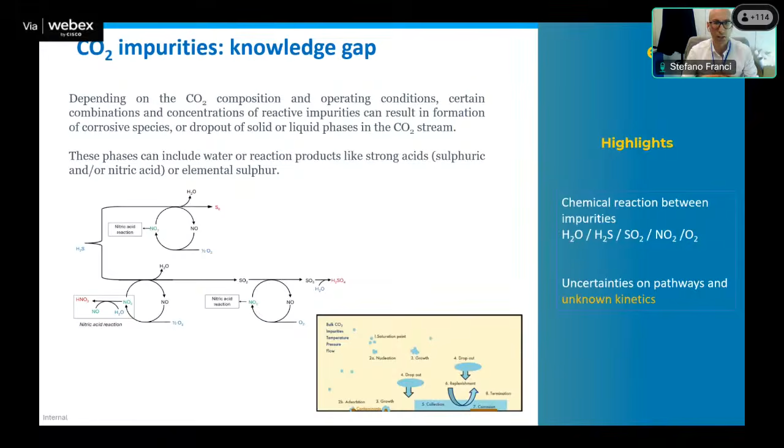The materials were carbon steel, standard piping and pipeline carbon steel, carbon manganese material, API and ASTM materials. We also added some 316 with a crevice feature because we wanted to simulate any issue for the valve trims, which are supposed to be in 316. So we wanted to test also some CRA, namely 316.

The scope of those tests was to verify, as Gerardo said, we wanted to base our composition on facts. So we wanted to verify the impact of the reactions among the bad boys. We wanted to highlight the role of water, reducing it to very low water, because we succeeded with very low water in Ravenna phase 1, so we can easily achieve low content of water. Then we wanted to replicate every condition along the pipeline: top of the line and bottom of the line corrosion.

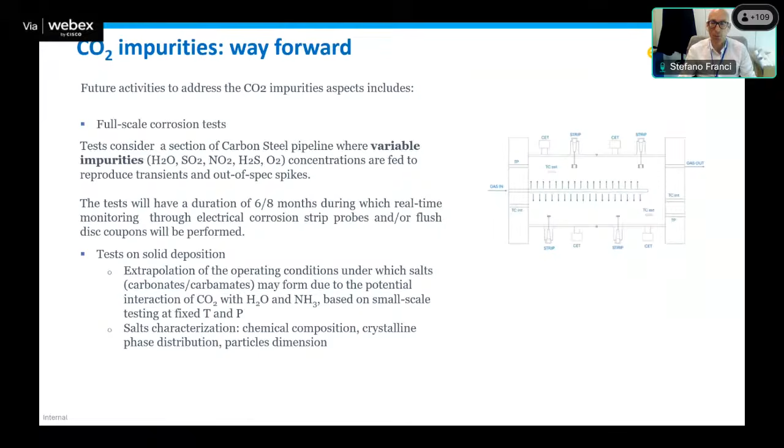So those are the way forward, because for us, the corrosion rate and the solid deposition is still a gray area, not explored by all the JIPs and all this literature reports. So we want to have this kind of additional info for our project. I guess that's it. Thanks for the attention.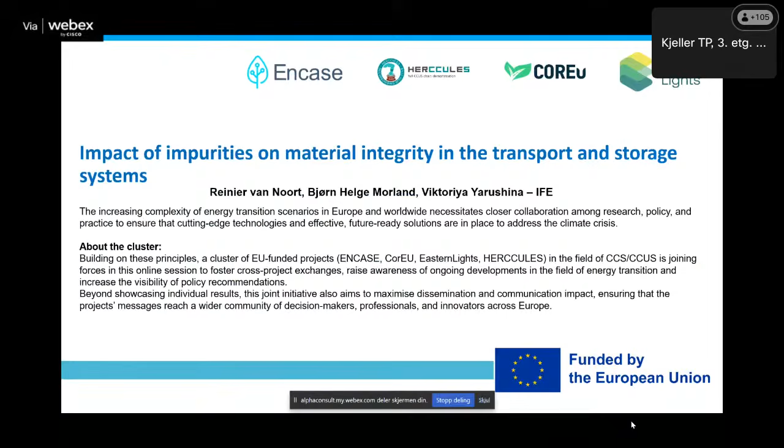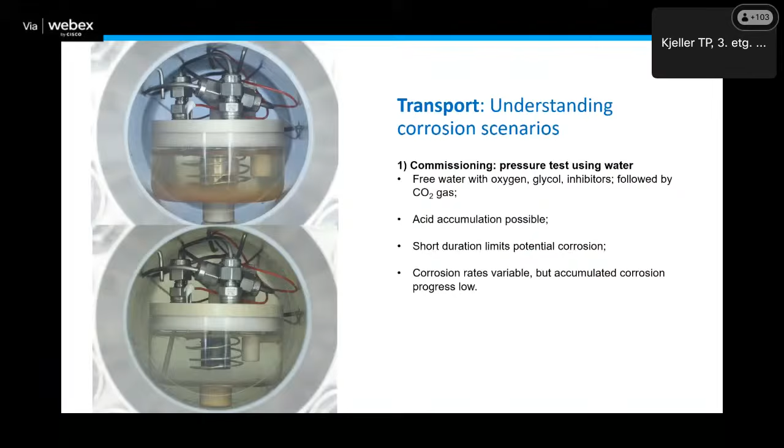So I have four slides here. The first slide here, we see what can happen already during the commissioning. So when a new pipeline is built, you test it with water and glycol and inhibitors to see whether it's pressure tight, and that's being tested here in this setup where an electrode system is used to monitor changes in corrosion on the steel coupon in the center of the cell. Typically, even though you have water, you have oxygen, it's possible that the corrosion rates can be high, but overall it's going to be very low corrosion because of the short duration, as long as you make sure to properly flush out everything afterwards using air, nitrogen, or just the CO2.

Next, showing an example of minor upsets, minor deviations. It was already mentioned in discussion. What happens if something goes wrong at one of these capture installations and dirty CO2 is sent into the pipeline and you quickly shut it down? This is some research on that.

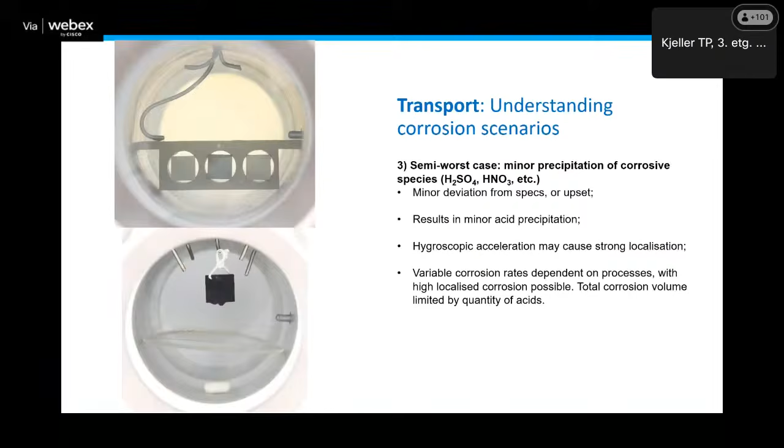On the whole, the total quantity of corrosion is going to be limited by the quantity of acid-forming impurities that are introduced, but you do have the chance that because these reactions are hygroscopic, they will localize. So even if the overall corrosion compared to your pipeline system is going to be very limited, it can be localized, and repeated localization, of course, will mess things up. So it is something to keep in mind.

And finally, some research in worst case scenarios. What if you get really icky stuff going into your pipeline? And as you can see, the colleagues at Corrosion don't even want to use their pressurized equipment for this sort of research. So it's just being done in glass beakers with a low CO2 pressure. And you can see that can have some very strong effects here. And again, it's mostly going to be limited by the amount of acid relative to the surface area of the steel of the system.

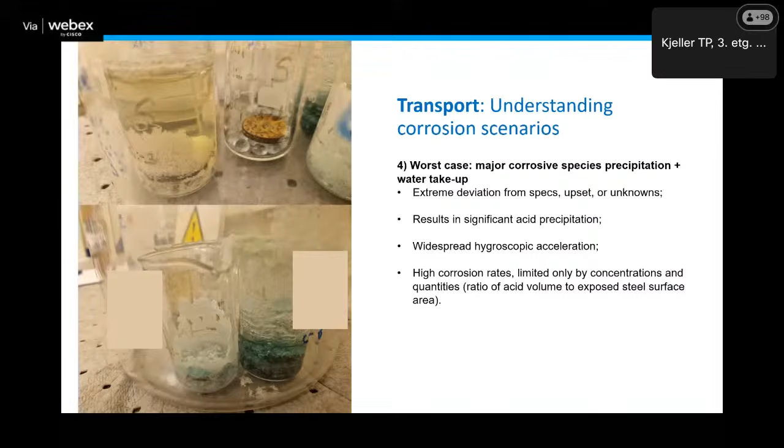And I think one important point that Björn wants me to reiterate here is that if you make a specification specific for one system, as other people also mentioned, you can be much more lenient with certain impurities if you know that others are not going to be there. So that shows the importance of understanding this as a system and understanding how different impurities affect one another, and how these reactions that I showed earlier are the key thing to keep in mind, and not just individual impurities. So yeah, then storage.

So my key point here is that ensuring well seal integrity may be the key challenge when you look at storage. Here in Europe, we're mostly looking at storing in siliciclastic reservoirs. So these typically consist of sandstone, quartz, and other silicate minerals that have already gone through a whole erosion process, a bunch of transport, etc., and stayed intact over thousands, millions of years. So typically these are fairly stable minerals. If we look at some of the projects, for example, in the Arabian Peninsula, where they're looking at storing into carbonate reservoirs, the story may be a bit different, as carbonates can be, of course, very reactive.

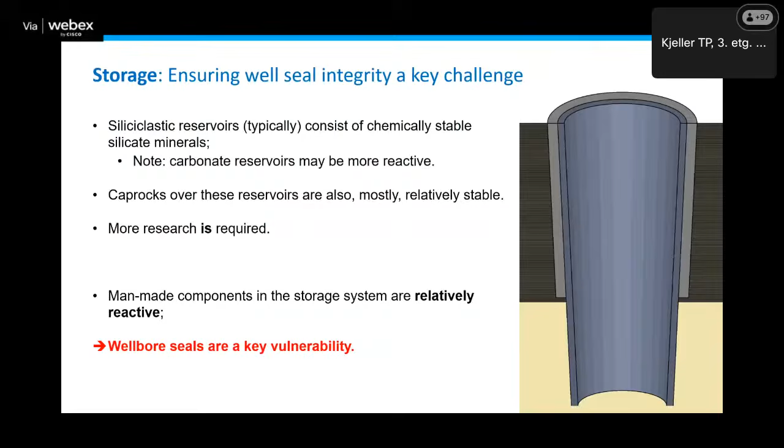However, when you want to inject CO2, you need to drill your hole, you need to put your steel pipes in place, and you need to put a seal between the pipe and the cap rock to ensure everything just stays there and doesn't come up again. And these man-made components that we're introducing into the storage system, these are relatively reactive and could be a key vulnerability in ensuring storage integrity. So I just introduced this slide after the question.

Regarding that impact, we can kind of identify 2 or 3 different main chemical impacts. On the one hand, we have impurities that increase dissolution, so as I said, acid forming, etc. On the other hand, we'll have impurities that increase precipitation. Taking the example of a carbonate reservoir, if you then introduce SOx, if that forms sulfuric acid, you'll then react that to form gypsum or anhydrite, which may have a larger volume than the calcite it's replacing, etc.

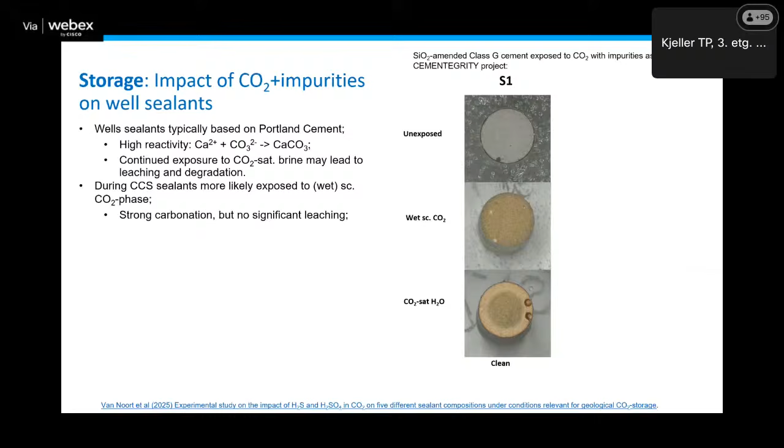Yes. And then we also exposed the same sample to wet supercritical CO2. So one was placed underwater in the autoclave, one was placed above water, and there you see it looks very different. We don't see this degraded outer zone where calcite has been dissolved, and instead we see a more gradual change. So carbonation leads to more solid formation and actually can improve the quality of your seal, but leaching will mess it up.

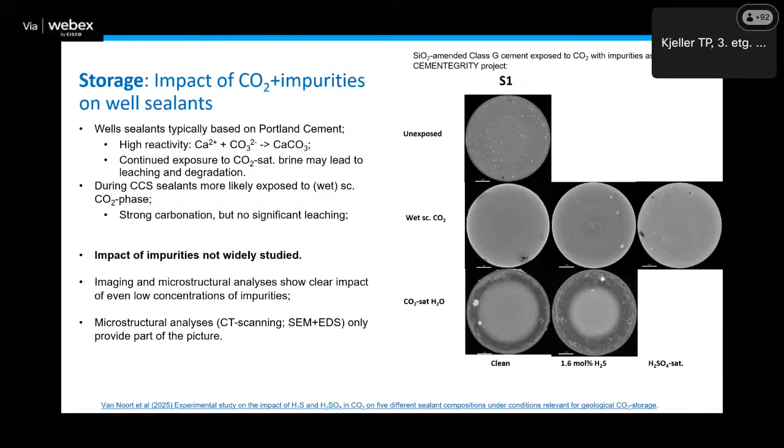But just these optical and CT images and SEM that we did doesn't give the full picture. We need to look also at XRD analysis to understand what's happening in these reacted zones. So looking first to the samples exposed to clean CO2, we see how some of the typical cement minerals, tobermorite, katoite, disappear and are replaced by a carbonate precipitation that's initially vaterite and then subsequently replaced by calcite and aragonite. So we see metastable vaterite precipitating first and being replaced or even removed if there's CO2 saturated water.

And this is a paper that we wrote with support from ENCASE. So that's currently published, awaiting review on Open Research Europe.

If you look at the sample exposed with H2S, there's two big differences. One is that the calcite or the carbonate content is reduced even more. The other interesting difference is that we see the appearance of a few percent of gypsum in this outer reacted rim. And, you know, we injected H2S, not SO4. So this clearly indicates that the H2S, the sulfur there, has been reacting with minerals in the cement, likely the iron minerals, reducing Fe3+ to form SO4 and then precipitate as gypsum.

So that's a very interesting observation, showing that these systems are still more complex than you think, and showing the importance of interaction between minerals and impurities in these systems. So this XRD study that we did gives a clearer picture of the mineralogical changes and emphasizes the impact of impurities, and that we need more study to properly understand this, as it's more complex than we would have expected initially.

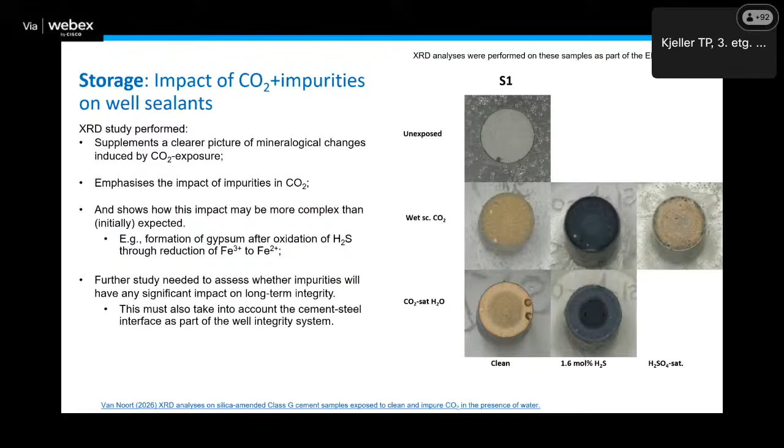So yeah, clearly further study is needed. We also need to look at the impact of these impurities at the cement-steel interface, which may be an even greater zone of weakness, or risk I should say, for integrity than the cement itself. And that's something that we should be doing more work on.

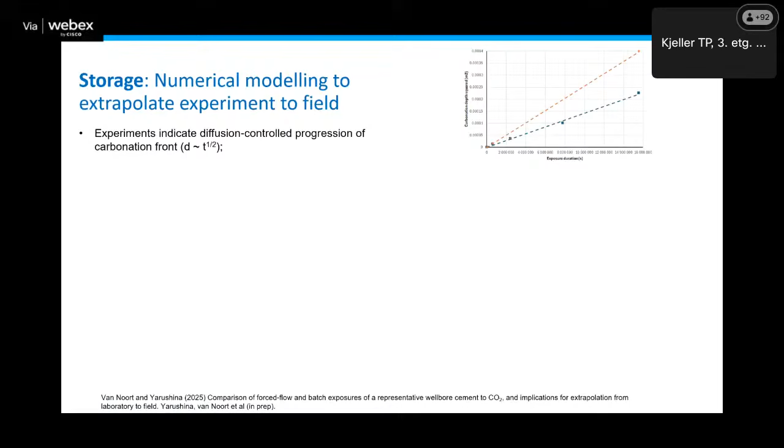How then do we go from having these small-scale experiments to understanding what happens over thousands of years? Of course, that requires modeling. So that's where Victoria comes in, my collaborator and supervisor. So here we see some carbonation depth from the experiments. We see that the diffusion-controlled progression is dependent on the square root of time. And then a simple reactive flow model combining chemical conversion, advection, and diffusion.

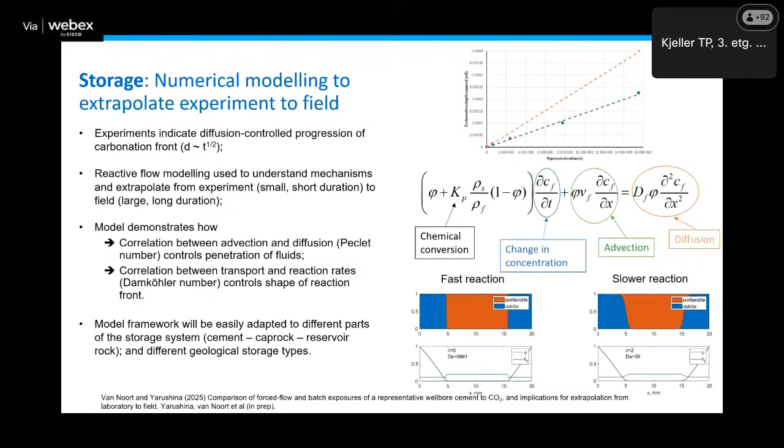The model can show quite nicely that when you have a fast reaction, you can still get a sharp reaction front, even if you have a diffusion-dominated system. So that's some in-prep work, as well as a presentation we did in Trondheim last year. And this modeling framework that we're building here for cement will easily be adapted as well for other parts of the storage system. That's kind of all I had to say for today.